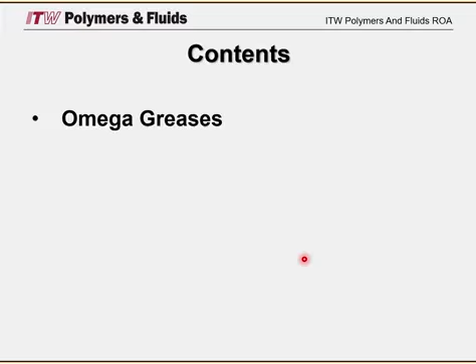So we will start today by going through our contents. Basically, we will be going through Omega greases today, also ITW background, Omega oils, gear oils and chain oils in particular, and food machinery products.

So I want to introduce to you the background to ITW. We were founded in 1912 in Illinois, USA. We are over 100 years old. We celebrated our 100th year anniversary in 2012, so it makes us over 107 years old.

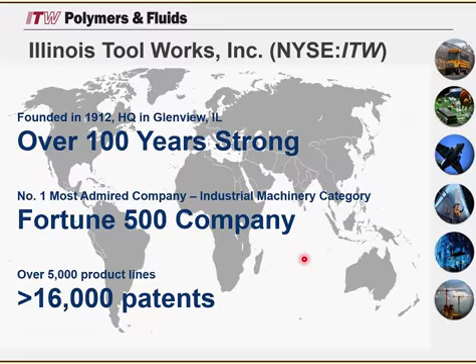We are part of the Fortune 500 company. I think this year, 2019, we're ranked around about 214. As an ITW company, we have over 16,000 patents.

ITW employs approximately, I think nowadays there's about 48,000 employees around the world. We operate in 57 countries, and 2017 total sales revenue was about 14.3 billion. In 2019, our revenue was a little bit improved, 14.8 billion.

As I said, we operate around the world, and most of our revenue comes from three regions around the world. 53% of our revenue comes from North America. Middle East, Europe, and Africa accounts for 28%, and Asia Pacific and others accounts for 19%.

In terms of our global reach, especially our manufacturing and production sites around the world, for Omega, we have production sites mainly in a couple of regions, in Europe and in Australia. Basically, about 80 to 90% of our products come from Australia and also Europe.

We have some products, especially not Omega, but in terms of Magna Welding, a lot of our products come from the USA. We also have manufacturing plants in Asia Pacific, namely in China, and also manufacturing sites in Brazil and India. Although for Omega and our other Magna brands, we don't have any products coming from these two manufacturing sites.

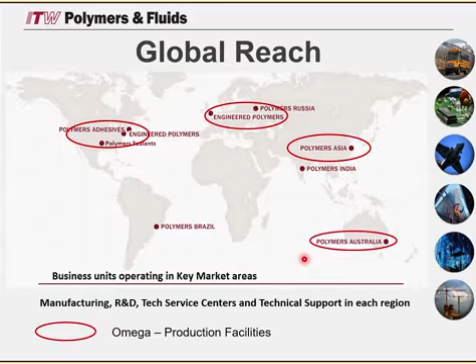So we'll talk about Omega next, greases. So why do we use a grease?

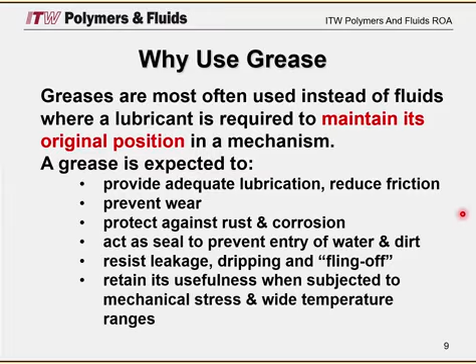Well, greases are most often used instead of fluids where lubricant is required to maintain its original position in a mechanism. So a grease is expected to provide adequate lubrication and reduce friction, prevent wear, protect against rust and corrosion, and act as a seal to prevent the outside environment, water, dirt from entering the equipment, the bearings, resist leakage, dripping and fling off, and retain its usefulness when subjected to mechanical stresses and perform under a wide temperature range.

So when to lubricate with a grease? When do we use it? Well, there are many various reasons, and these are some of the reasons I've put down here, mainly to decrease the frequency of lubrication, especially in extreme locations. For example, if you have a wind turbine, wind generator, those things are very high up in the sky, and you don't want to frequently change your oil or your grease, because it does take a long time to reach those parts in a wind turbine.

You want to seal out contaminants. If you have a very dusty environment, or maybe sometimes like in mining or construction where there's a lot of dust and dirt, you don't want that dust and dirt entering your equipment, so you would use a grease.

Or, for instance, for intermittent operations, if you have some generators which you're not usually using, or some air compressors which you're not usually using 24 hours, maybe as a backup system, and so you're only using it for maybe a few hours or a few days during the month or year, so you use a grease.

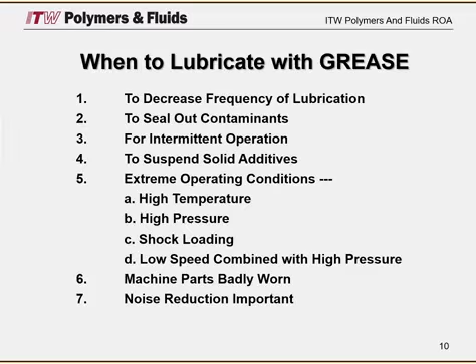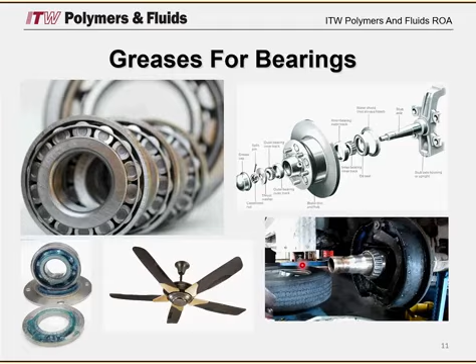So basically, greases are used to lubricate bearings, and you can find bearings in a wide variety of equipment. Bearings are a device to support and reduce the friction of motion between fixed and moving machine parts. So you can find them in almost every single machinery, you can see here in fans, wheel bearings, DVDs, bikes, washing machines, etc. You can find bearings in almost everything.

So what is a grease? Well, a grease is a solid or semi-fluid product of dispersion of a thickener agent in a liquid lubricant.

Also in greases, apart from having a thickener agent and the base oil, you would also have additives. These additives are ingredients which impart special properties that are included in the grease. Here you can see this is a photograph of Omega 57, and you can see the thickener inside as well.

So a grease is basically made up of three parts: the base oil, the thickener, and the additives. We can consider a grease to be like a sponge. The pores are created by the thickener, and the pores are what holds the oil in the structure.

Once we apply forces or pressure stresses to the grease, or the sponge in this analogy, it causes the oil to be released from the thickener to provide the lubrication. Once these forces or stresses are reduced or not there anymore, the oil should be reabsorbed back into the thickener.

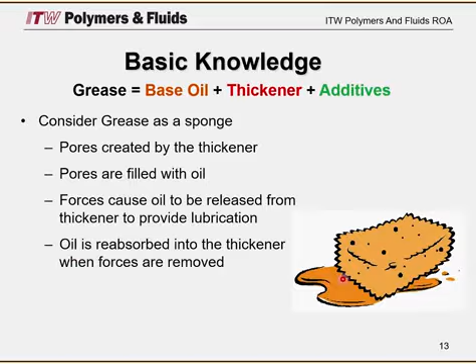In terms of composition, thickener is approximately 2% to 30% in the grease, the majority of which is the base oil, which accounts for 60% to 98%. In the thickener, you have various types of thickener content: metal soaps, metal complexes, non-soaps and soaps, and clays, etc. And the base oils include mineral oils, synthetic oils such as polyalpha olefin, esters, polyglycols, silicone oils, PFPE, etc.

And also additives account between 0 and 10%. These additives add extra performance enhancers to the grease, such as anti-aging, anti-corrosion, EP additives, etc.

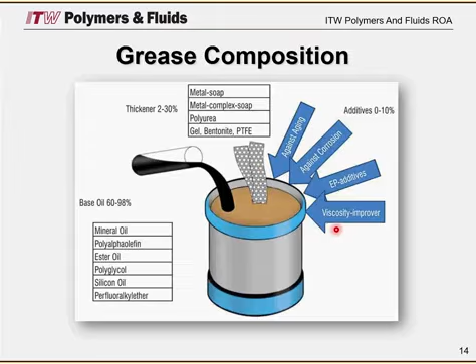So the base oil is basically used as the lubricant within the grease. They can be made of minerals, synthetic, natural oils, etc., and used in combination with the thickener, which provides the body and the structure.

These thickeners can be redefined as soap or non-soap components. The additives enhance the performance of the lubricant with oil-soluble components to control extreme pressure, wear, etc. We can also have solid components such as MoS2, graphite or polymers, calcium carbonate, and other types of solid additives.

About the thickeners, the grease consistency, or how hard or soft, is governed by the thickener and the composition of the thickener. You would think that the base oil, being higher or lower viscosity, would have some effect on whether the grease would be hard or soft, but in fact it doesn't.

We can have very thick greases with very low viscosity, ISO VG100, and we could have semi-fluid greases where the viscosity of the base oil would be quite high, ISO VG460 or higher. So you can see the consistency of how hard or soft doesn't depend on the viscosity of the base oil. It really depends on the thickener content. If it's a higher thickener content, then the grease would be firmer, and if it's a lower thickener content, the grease would be softer.

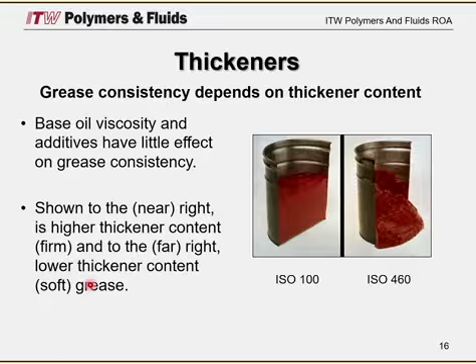So there are two types of thickeners, as I mentioned before: soap or non-soap. And it must be emphasized that different thickener types of greases should not be mixed unless their compatibility has been confirmed by testing to the relevant applications. Within Omega, we have the compatibility chart, which we will go through later on.

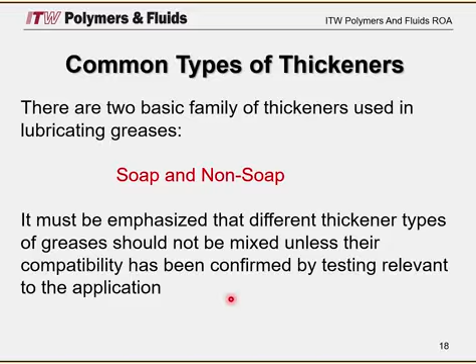So what types are soaps and non-soaps? Soap-based thickeners are lithium, calcium, aluminium, sodium, etc. You can have straight lithium, aluminium, calcium, sodium mixed, or complex, like complex such as lithium complex for our Omega-22, or straight thickeners, soap thickeners like our Omega-77, which is lithium 12-hydroxystearate.

Then there's also non-soap thickeners such as clay, such as our Omega-71, polyureas such as Omega-85, and others, namely silicon dioxide based thickeners such as Omega-38. So basically there are two types of families of thickeners.

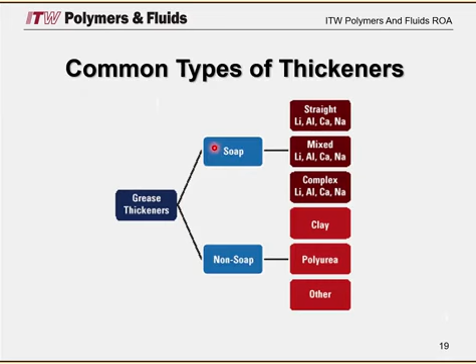Now we come to the additive part. Additives make up between 0 and 15% of a typical grease to enhance the lubricant performance. Additives bring properties to the grease that the thickener and the oil cannot provide alone, or can only provide on a limited basis.

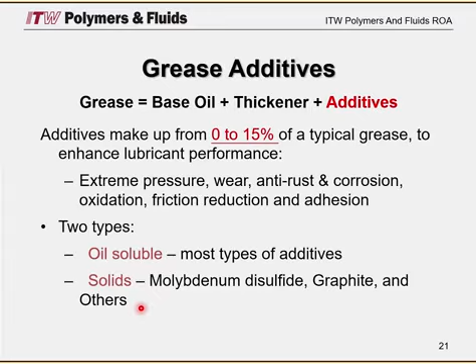There are two types of composition for the additives: they are either oil soluble or solids. Solids meaning solid additives such as MOS2, graphite, and others. These additives have different types and functions. They can be anti-wear EP agents, which reduce friction and wear and prevent scoring and seizure, corrosion inhibitors and rust inhibitors, viscosity modifiers, antioxidants, etc. These are the purpose of what these additives are for and their functions.

So in terms of base oils, we use the API, American Petroleum Institute, base oil definitions. All base oils can be categorized into 5 groups. Group 1 and Group 2 are mainly mineral oils. Group 3 and Group 4 are known as synthetic oils, such as PAO. Group 5 are the others, which include silicone oil, polyglycols, etc.

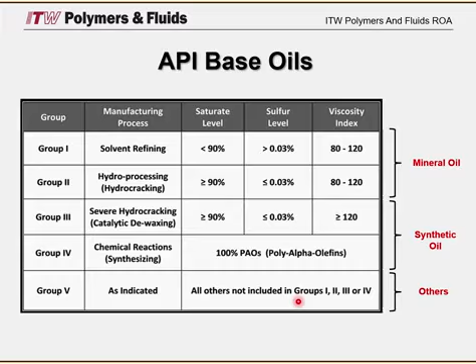We have some diesters, polyesters. We don't use polyglycols as a grease, but we do have polyglycols more as a carrier fluid, especially in Omega 35. Obviously, we don't have silicone oils in our greases.

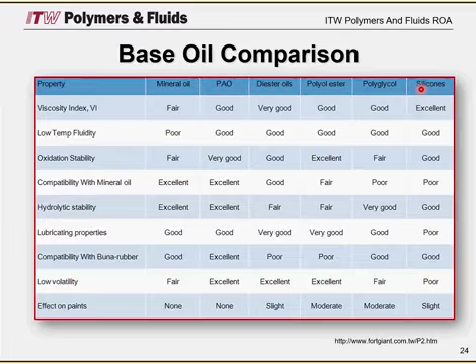So for base oils, we talk about the viscosity of the base oil. Viscosity, the simplest definition, is the fluid's resistance to flow. So viscosity is a lubricant's resistance to flow. The viscosity of an industrial lubricant is normally given in units of centistokes.

Or we have the ISO VG naming system, VG 32, 46, etc. In Omega, we also use the SAE naming system. So SAE 5 would be ISO VG 15, SAE 10 would be ISO VG 32, etc. Viscosity is the main feature which influences the efficiency of the lubricant.

So in terms of real-world experience, what does viscosity mean? For water, normally the viscosity is 1 at a temperature of 20 degrees. You can see that viscosity is really governed by the temperature at which it's measured. For instance, water at 20 degrees has a viscosity of 1. Milk has a viscosity of 3 at 10 degrees. For us, we're normally more used to diesel, which has a viscosity of approximately 6 centistokes at 40 degrees.

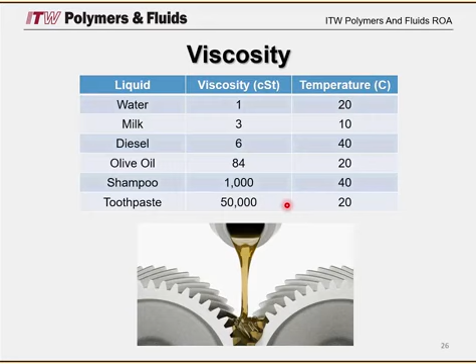All the way to maybe a semi-fluid or even like hard toothpaste, which would have a lot higher viscosity at that temperature range.

So this is just the ISO VG classification. You can see here VG 32 all the way to 3200. The midpoint viscosity is 32, and it also has a range. So anything between 28.8 to 35.2 centistokes at 40 degrees can be named as ISO VG 32, and each one would have a mid-range, a minimum, and a maximum.

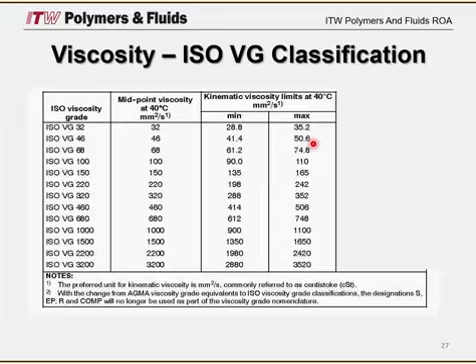Viscosity is really dependent on the temperature at which it's measured. At higher temperatures, say 100 degrees, a liquid or oil would obviously have a much lower viscosity. At a lower temperature, between 0 and 50 degrees, the liquid or oil would have a much higher viscosity. So viscosity of a fluid is really a function of temperature.

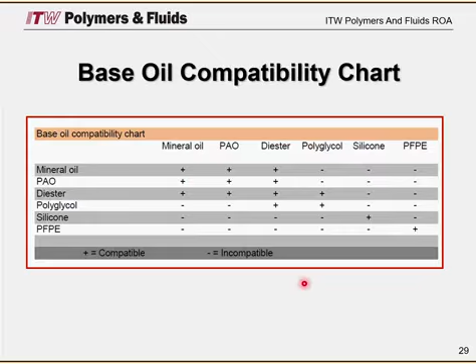In terms of grease consistency, how hard or soft it is, this is defined by the NLGI rating. NLGI 000 is a semi-fluid with a worked penetration of between 445 to 475 - I need to check that figure again. The analogy would be ketchup, all the way down to NLGI 6, which we very rarely see, with a worked penetration of 85 to 115. Normally in industry we see 000, 00, 0, all the way probably to 3, and the stiffer greases 4, 5, 6 we very rarely see.

The DN value is like the maximum revolutions per minute that we normally recommend our greases to be used at. For something like a very stiff grease, like an NLGI 3 for Omega 57, our DN value would be approximately up to about 150,000. For most of our greases, it's between 200,000 and 300,000 DN value.

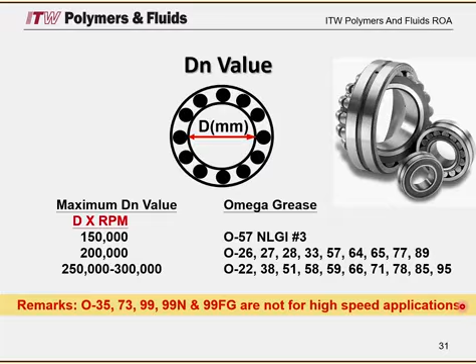In terms of operating temperature, if between minus 34 and 37 degrees, depending on the speed factor, we would recommend maybe an NLGI 1 all the way to NLGI 2. Of course, for higher temperatures we would normally recommend a much stiffer grease. This is just a quick reference you can use when going to a customer, for what sort of NLGI they should use. It really depends on the operating temperature and also the speed - low speed or high speed, depending on the NLGI. For a very low speed application I would use an NLGI 1, and for high speed we would use a little bit of a thicker grease.

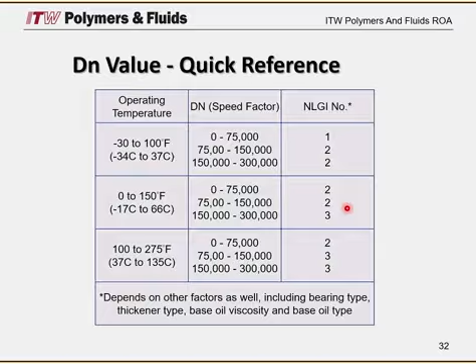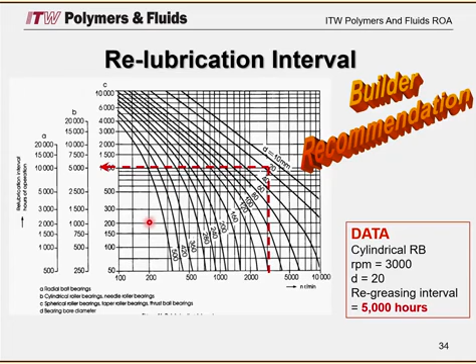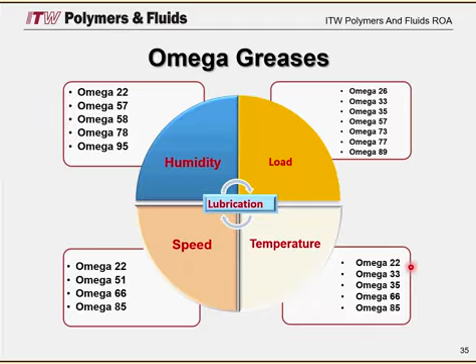In particular, 66 and 85 would be our first recommendations for high-speed applications, mainly because for 66 especially, the base oil viscosity is quite low, which is more suitable for high-speed applications. For high temperatures or extreme temperatures, both high and low, we would recommend greases 22, 33, 35, 66, and 85.

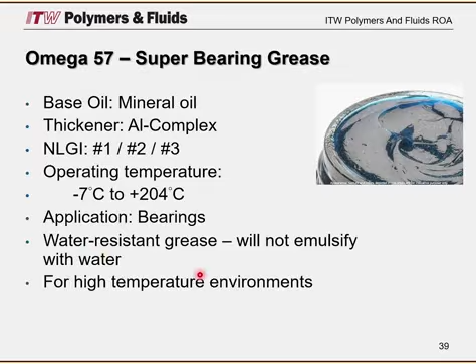Same application for bearings, and as we saw from the chart before, aluminium complex thickened greases have very good water resistance and will not emulsify with water, so they can be used for high temperature environments.

Omega 89 is one of our most recent additions to the Omega range. This is a multi-complex soap, a mix of lithium and calcium, so it has the best of both worlds in terms of mechanical stability and water resistance. It has a very high 4-ball weld load, 800 kg, without the use of any solid additives.

Because it has a calcium and lithium complex mix, it has very good water resistance and anti-corrosion properties, and a relatively higher operating temperature than, say, Omega 77, which is just a single lithium 12 hydroxy type. It also has very good low temperature resistance, -30, compared to something like -7 for Omega 77.

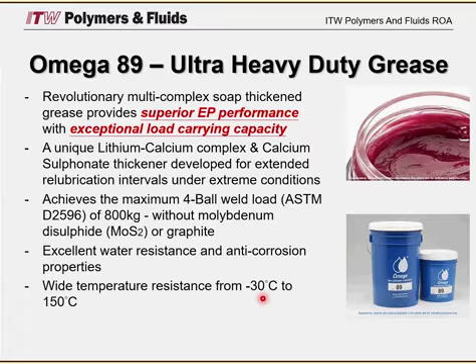So it has a wider temperature range, -30 to 150, compared to 77. In terms of non-soap type greases, polyurea are one of our best top-selling products. Omega 85, again, is mineral oil, and the thickener is polyurea, available in 2 NLGI grades, 0 and 2.

We have a wide operating temperature between -10 to 230. The main applications, again, are for bearings, but mainly in LV, MV, and high tension electric motors. Also, it's proven for industrial use.

We have OEM approvals, customer testimonials, and case studies. We recently came across a case study from a tire distributor who used 85, and he was able to prove that in operation it was able to bring down the equipment temperature by, I think, over 10 degrees. Obviously, if you're bringing down the equipment temperature, you would also save a lot on power.

Also, he demonstrated that using 85, they were able to reduce the noise of the bearing. I have a video, but I can't show it here, showing the before and after effect of the bearing, and after using 85, there's a significant reduction in the noise of the bearing. If you need that video, we could arrange to put it on the intranet site in the near future.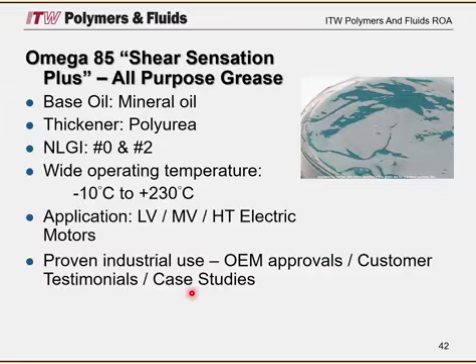Omega 22 is PAO. So now we're introducing the synthetic types of base oils for our greases. Omega 22 uses PAO synthetic base oil, lithium complex thickener, with solid additives - PTFE as a solid additive - available in NLGI 2. Because we're using PAO base oil, it has a much wider operating temperature, especially the lower range of -40, and the upper range up to about 210 degrees.

Can be used for high loads, and because of the molecular structure of PAO, it resists oxidation, and resisting oxidation leads to longer grease life. Some applications: the paper and corrugated cardboard industry uses a lot of Omega 22.

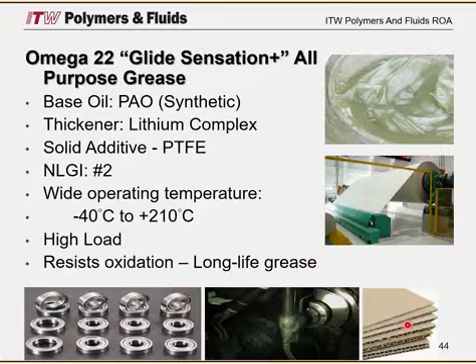Then we have our PFPE base oils, such as Omega 26. Again, this has a PTFE thickener, available in NLGI 2. Not so high range at the low end - operating temperature of -25 - but it has a high range, operating up to 280 degrees C.

Chemically inert, meaning there would be no changes in the grease if it's subjected to acids or alkalis, and it's non-toxic and compatible with rubber, plastic, or metals. We would recommend something like 26 if you have plastic or rubber bearings. We wouldn't recommend normal greases for plastic or rubber bearings, but something like a 26 would be fine with plastic and rubbers.

It's used for anti-friction, plain bearings, small gears, slides, pins, valves, plungers, screws, etc. So a wide variety of uses for this grease.

So we just want to touch upon possible grease failures. Sometimes we get a lot of inquiries about why a grease is failing. Some of the reasons I've consolidated, but the number one reason why grease fails is that the incorrect lubricant is used.

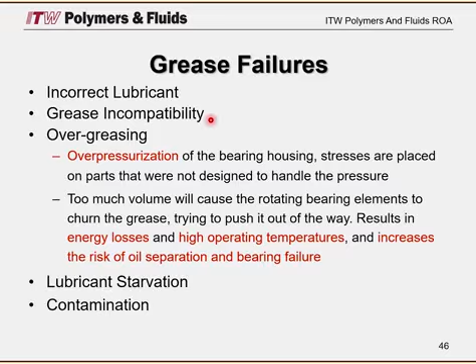In terms of compatibility, as long as two lubricants have similar thickener systems and base oils, they should not have any compatibility issues. That's not always the case. Sometimes, apart from thickener systems and base oils, greases also contain additives. Obviously we don't know what additives are used in the greases, especially our competitors'. And sometimes the additive chemistry can be different, which could also cause compatibility issues. So in general, yes, as long as the thickener system and base oils are similar, you should not have problems, but it's not 100%.

It's important to thoroughly clean or purge the old grease from the parts to ensure the new lubricant's properties are not changed significantly as a result of being mixed with the old grease. So worst case, if you don't know what the old grease is, the best practice is to clean and purge out the old grease. You may have to open the bearing and do a thorough clean-out before using the new grease.

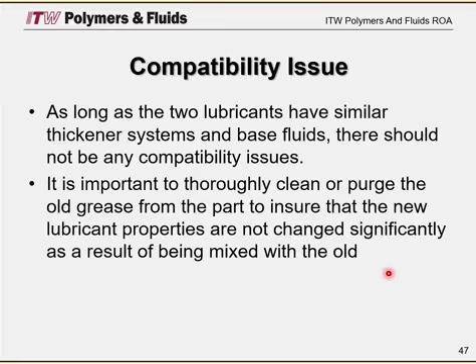So some examples of overgreasing you can see here. The grease is really coming out of the bearing—that's from adding too much grease, and it's coming out of the bearing. You can see it very clearly here. And here we can see the mixing of two different types of greases. You can see two different colors, which represent two different types of greases.

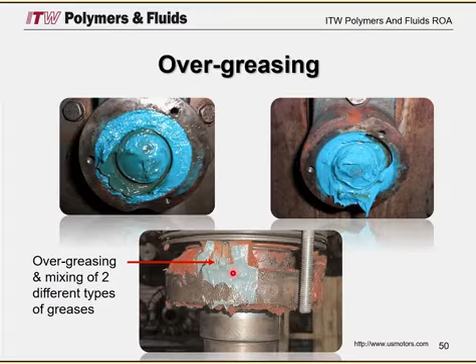Overgreasing, you can see here also, comes out of the bearing, and it's just a waste. It serves no purpose at all—it doesn't help the bearing, and it's a waste of the grease.

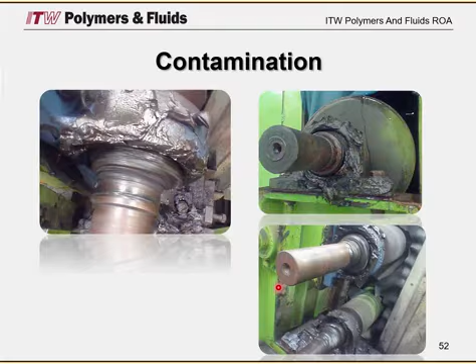This is what I was talking about before, about the grease being subjected to different chemicals. You can see here the grease has completely changed color due to being exposed to alkaline vapor. I think it was probably at a limestone or cement factory, where they're using lime, or perhaps a chemical factory.

So I'd also like to talk about oil separation. Sometimes, especially for a product like Omega 77, you can find on top of the grease—in lubricators, pails, drums, or the grease gun—the presence of oil, and this is known as oil separation. You need to understand that this oil separation is insignificant when compared with the mass of grease in the container.

So something like here, you can see some oil separation within these holes of the grease. You would get more oil separation if the grease is shaped like this. If it was flat, the grease would have less oil separation.

The separated oil can be safely stirred back into the bulk of the grease. So if this happens with the grease, what you can do is just use a ladle or some sort of instrument to mix it back into the grease. You don't have to use a mechanical stirrer—it's just done by hand, folding the grease over and over. Then, because it's like a sponge, as I said at the beginning, once you've applied some pressure to the thickener, the oil should be reabsorbed back into the grease.

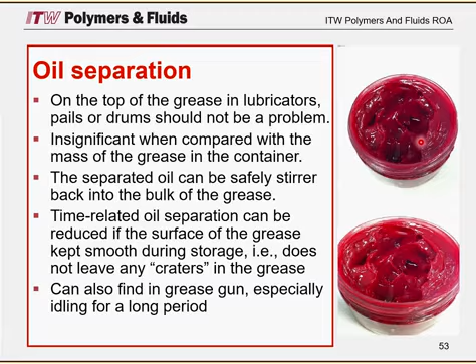So it's nothing really to be worried about, unless the whole top area is completely covered — if in a grease pail you see a very high layer of oil, then maybe there could be concern, but I very rarely see that sort of case. It would just be like small puddles on top of the grease.

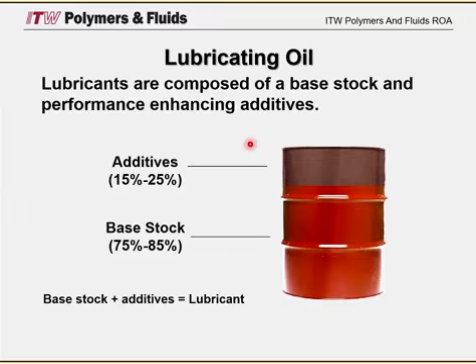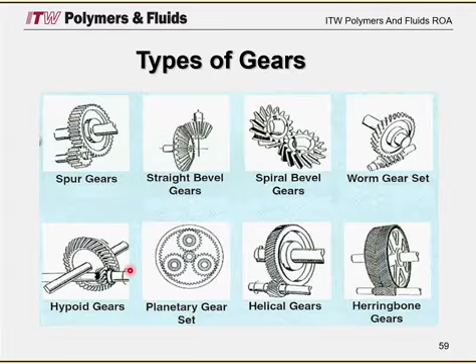In terms of lubrication of gears, we can find gears in many different types of everyday items, from watches to your bicycle to huge open gears found mainly in the cement industry. Different types of gears include spur gears, bevel gears, helical gears, planetary gears, herringbone — these 8 types basically make up most of the gears we can find. They're used in all types of industries, from agriculture, automotive, sugar, cement, chemical, and many more, so almost every industry has some type of gear application.

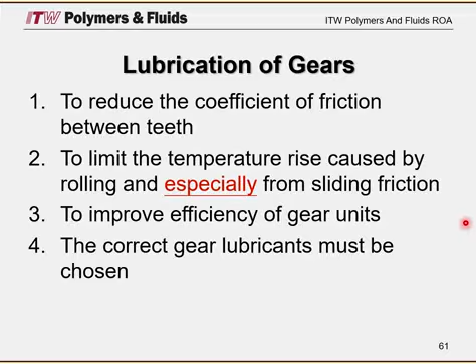Gears are used to reduce the coefficient of friction between the gear teeth, to limit the temperature rise caused by rolling, especially from sliding friction. This is particularly relevant in worm gears, where it's mostly sliding friction. To improve efficiency of the gear units, the correct gear oils must be chosen.

For Omega, we have both grease products and oil products. For grease products, there's Omega 64 and Omega 73 for open gears. We also have food grade NSF H1 gear oils, 585 and 588, our mineral gear oil 670, our worm gear oil 680, and for industrial gears, Omega 690.

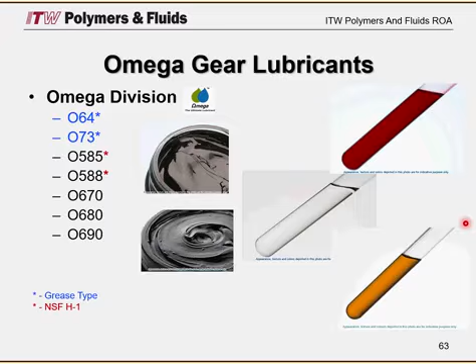In terms of greases, Omega 64 is a pin and bushing and track roller grease, mineral oil based, 00 semi-fluid, ultra tacky, with a temperature service range between -7 and 149, and provides extended service compared to ordinary greases. Can be used in slow moving industrial gears, or for example open gears where fluid grease is required.

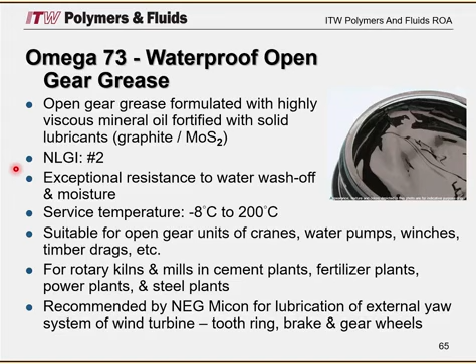Omega 73 we use for open gear greases. It's fortified with solid lubricants, graphite and MoS2, available in NLGI 2, and has exceptional resistance to water wash-off, with an operating range between -8 and 200 degrees C. You can use these in open gears or cranes, water pumps, winches, timber drags, rotary kilns, mills, cement plants, etc. It's also been approved by NEG Micon, now Vestas, for use in the external yaw system of wind turbines.

In terms of oil, especially for the food industry, we have Omega 585, which is synthetic based, PAO based, VG 220-460, NSF H1 approved. It's an extremely adhesive lubricant with excellent protection against water wash-off and a wide operating temperature between -30 and 240. Used for all gear units in the food and beverage industry, and also approved by David Brown.

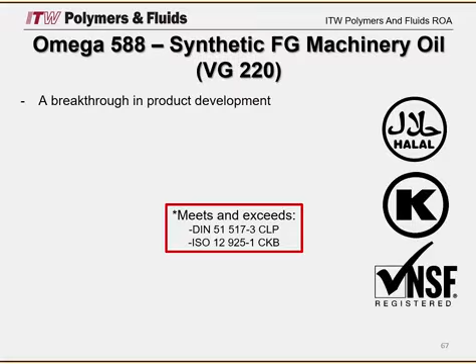Our most recent addition is Omega 588, which apart from being NSF H1 approved, is also halal and kosher approved. It meets FDA 21 CFR since it's H1 approved, and is manufactured in a facility that is ISO 21469 approved. It's also approved for industrial use, meeting and exceeding DIN 51517-3 CLP and ISO 12925-1 CKB. Based on PAO technology, the base oil is PAO, and it can be used for multi-purpose lubrication, hydraulic circulating systems, and medium to low loaded bearings.

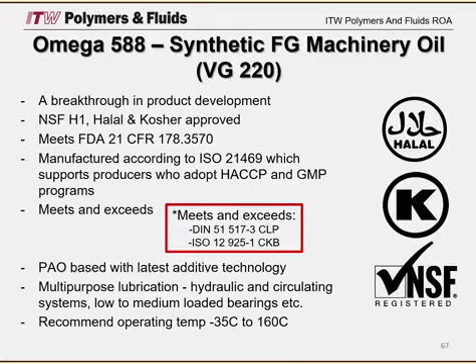Omega 670 is a straight mineral oil, meaning it's just the base oil with no additives. Some applications require just a base oil without using any additives, so this is a gear oil for those sort of applications, suitable for lubricating and protecting gear units where non-EP oils are required.

680 is used for worm gears. It's formulated with mineral oils as the base oil, and formulated with solid lubricants to provide protection for elevated temperatures up to 400 degrees C. Available in VG 220 and 460, and can boost efficiency of worm gear sets by 8%. It can also be applied on bevel and spur gear units, and is recommended by David Brown.

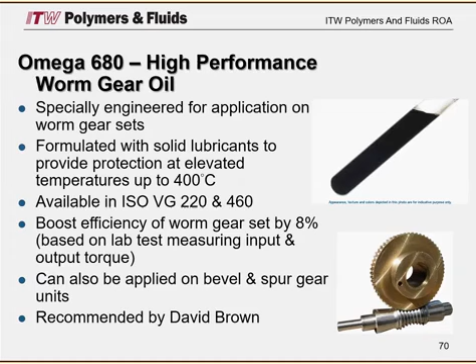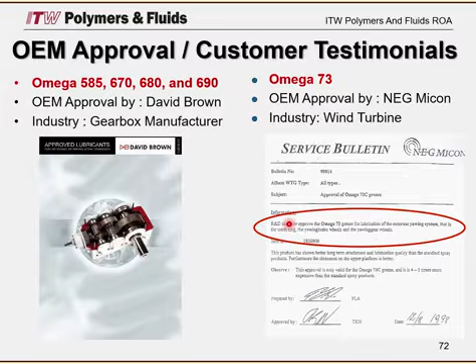The following slides are just the OEM approvals and customer testimonials. I won't go through them each one, but you can see, for instance, Omega 73, which was originally approved for NEG Micon, and now NEG Micon has been merged with, or been bought by, Vestas. David Brown gearbox manufacturer approved lubricants list - we have Omega 585, 670, 690, 680 and 690, which are on the approval list. And then other equipment manufacturers which also have these approvals, so you can go over these at your leisure.

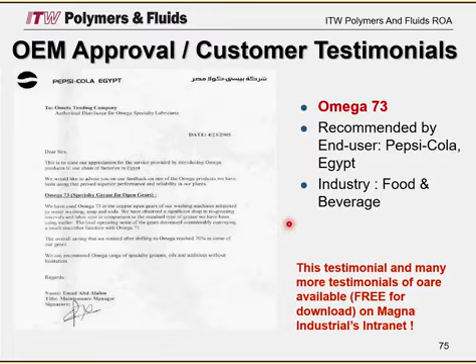Factors to be considered when choosing a chain lubricant: whether those chains are under high loads, and if under high loads, whether elongation happens on those chains. If that is the case, we normally recommend chain oils with EP additives or very high viscosity base oil, as high load carrying capabilities of the chain oil is required.

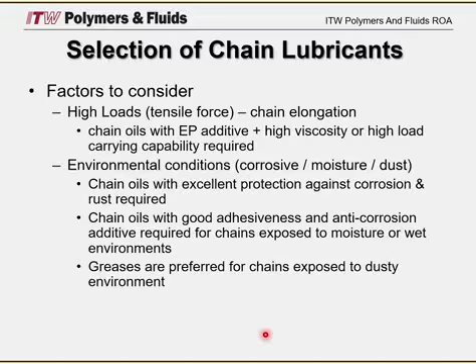Sometimes we have to understand the environmental conditions - whether it's a corrosive environment, there's moisture, or there's dust - and chain oils with excellent protection against corrosion and rust are recommended for these type of environments. Chain oils with good adhesiveness and anti-corrosion additives are required for chains exposed to moisture or wet conditions. Greases are preferred for chains exposed to dusty environments, because greases can seal the chains from being exposed to those dusty environments.

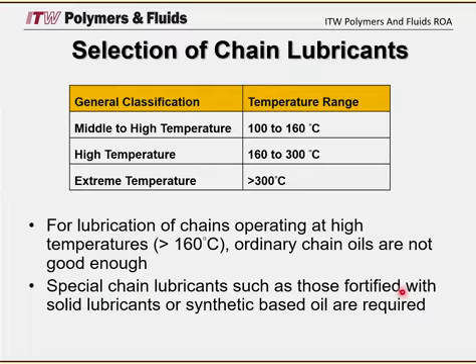In terms of temperature range, chains are often subject to different temperature ranges. Medium to high temperature would be up to 160, high temperatures between 160 and 300, and extreme temperatures would be over 300 degrees C. For lubrication of chains operating at temperatures greater than 160 degrees centigrade, ordinary chain oils are not enough, so we must use special chain oils, such as those fortified with solid lubricants or synthetic base oils.

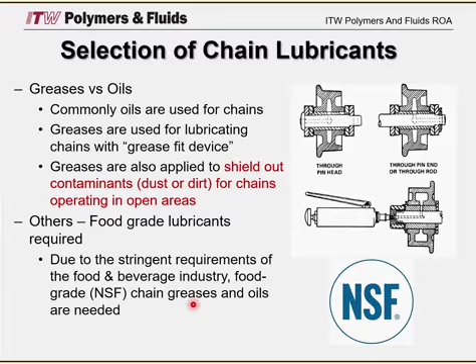As you saw before, in Omega we have a selection of both greases and oils. Commonly chains are lubricated with oils, but greases can be used sometimes if there are grease fit devices to the chains. Greases are applied in some instances to shield out contaminants, especially in very dusty or dirty areas, for chains operating in open areas. Others to consider: if food-grade lubricants are required due to stringent requirements of the food and beverage industry, something like an NSF-approved chain lubricant or chain grease is required.

For much higher temperatures, if the chain is subjected to a lot higher temperatures, you would probably need a chain lubricant which has solid lubricant. Solid lubricants are included in the lubricant to provide extra protection to the chain, usually utilizing dry lubrication on the chains at elevated temperatures.

What I mean by this is, say for instance, we know that mineral oils can only withstand up to maybe 200 degrees. Definitely over 230, mineral oils normally cannot withstand it, and they start to decompose. So once that starts to happen, you have nothing really lubricating the chains. That's why they have to rely on the solid additive to provide some sort of dry lubrication to the chain. The oil-based fluids act as carrier fluid of the lubricants at elevated temperatures.

So some chain lubricants only use oil, especially if they're using polyol esters as a carrier fluid. Polyol esters have some limited lubrication to the chain at lower temperatures, but once high temperatures occur above maybe 250, or if we're approaching 300 degrees C, those base oils, the carrier fluid, polyol esters, will evaporate or flash off. So you're only left with the solid lubricant to lubricate the chain.

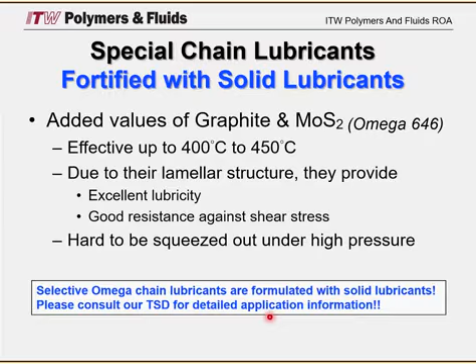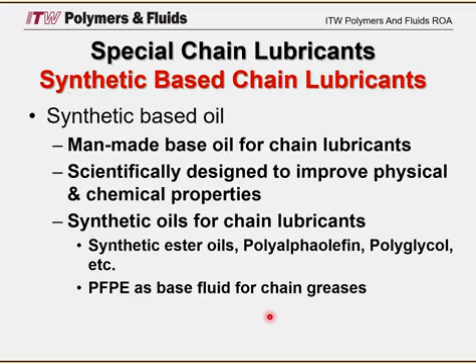Synthetic base oils have a much higher viscosity index, meaning they can withstand a much wider temperature range. And also some synthetic base oils have a low tendency to carbonize. So like if you're using a mineral oil-based chain lubricant at very high temperatures over 250, once the mineral oil starts to decompose, it would carbonize. And once it carbonizes on your chains, then it would cause blockages.

Those carbon deposits cannot fall away, they will stick to the chains. So that's why you have to use synthetic base oils which have low carbon when they are subjected to higher temperatures, such as synthetic esters or polyol esters, which would give a lot less carbon, or leave a lot less carbon once they start to decompose.

High temperature stability, maintaining high performance at high temperatures, high lubricity, protection of the gears and chains against wear. Again, if you need information on what sort of synthetic chain oils that you should use, please consult us.

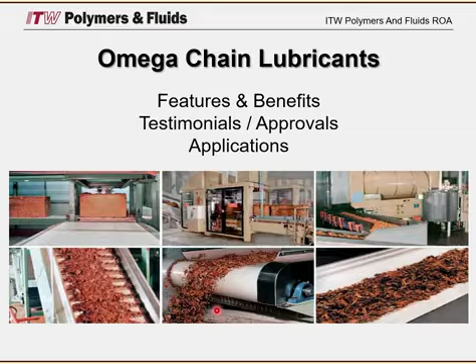And next would be features and testimonials. Oh, no, I don't think so. I think I took those out to save time.

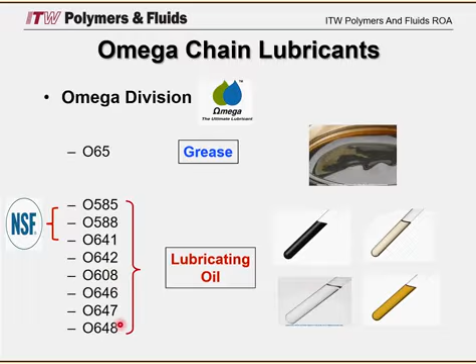In terms of our product offer in Omega, we have Omega 65, and also, as I said before, we also have the oils, Omega 585, 588, 641, and these would be food grade. And then we also have the other 642, 608, 646, 647, 648, which is the other chain of oils.

65 is the long life chain and cable grease, which is our grease offering for chains. It's fortified with graphite and available in the semi-grease NLGI 00 for better fluidity and penetration into especially the chains. And it's very tacky, so it resists fling off. Surface temperature between -29 and 149 degrees C. Can be used for hoists and lifts of chains, also suitable for wire ropes and crane cables.

641, Omega 641, is used for the food and beverage industry. It's food grade approved, NSF-H1 listed and approved, and available in ISO VG 220.

Extremely adhesive, known for its adhesiveness and has excellent protection against water wash-off. Has quite a good temperature range for operation between -10 and 280. And because it is made of synthetic ester, it leaves little or no residue on the chain once it's subjected to higher temperatures.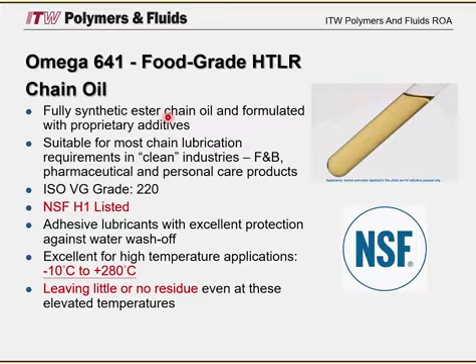642, apart from being NSF H1 approved, is also halal and kosher approved, meeting the various FDA 21 CFR and ISO 21469 standards. Again, this is synthetic ester based with additive technology, formulated with both ester and special additives, and it has the properties of being a high temperature, low residue chain oil for oven chains, operating conditions between -15 and 240.

It's available in two viscosity grades, VG68 and VG220. And you can see here, there's a slight difference in operating temperature between the two viscosity ranges.

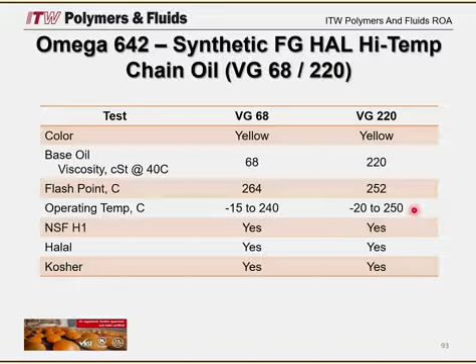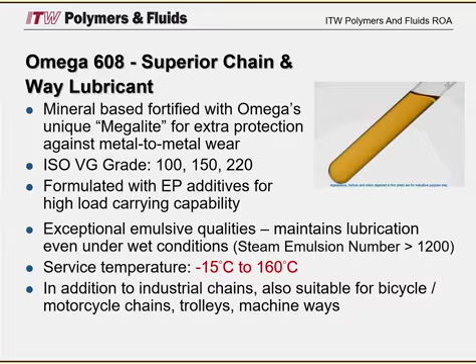608, which is the way and chain oil, is mineral oil based with the Omega Megalite additives added to it. Available in 3 viscosity grades, VG100, 150, and 220. It contains EP additives as well. Has exceptional emulsive qualities and maintains lubrication even under extreme wet conditions, with service temperature between -15 and 160. Suitable for industrial chains, also for everyday items like bicycle chains, motorcycle chains, trolleys, and machineways.

646 is a mineral oil-based chain lubricant with MOS2, available in 3 viscosity grades: VG68, 150, and 220. Due to the presence of MOS2, it relies on dry lubrication, especially at temperatures over 300 degrees up to 400 degrees.

Formulated with special additives to cope with the stick-slip that commonly occurs in slow-moving, heavily loaded chain equipment. Because it contains mineral oils, you would get carbon residue at very high temperatures, so we recommend periodic cleaning of the chains to keep them in optimal condition. Also suitable for most types of chains and conveyors.

647 uses polyol ester base oil, so it would leave no carbon residue on the chains at very high temperatures. It's formulated with MOS2, meaning at temperatures above 300 up to 400, the MOS2 would be the additive used to lubricate the chains, because at that elevated temperature the synthetic base oil would have already evaporated. But the good thing about this is there would be no carbon residue, and there would be low smoke at those higher temperatures. So there would be little need to clean the chains, because there wouldn't be any carbon residue on the chains if they were using 647.

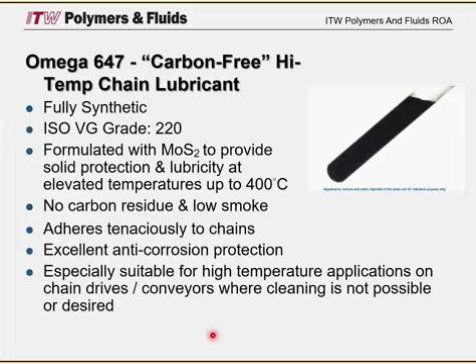Smokeless - again this would be 100% synthetic base oil, available in VG150. So this would be smokeless, whereas with 647 you would probably have some low smoke at those elevated temperatures, but 648 would have no smoke. Sometimes end users at those high temperatures, if they see some smoke, get very concerned. That's why there's Omega 648 - because at those high temperatures there would be no smoke on the chains.

With 648, because there are no solid additives, it could only withstand temperatures up to 270. So once 270 is surpassed, all of it would evaporate or flash off, as we call it, and then there would be nothing lubricating the chains. So this is effective if you really want to maintain super cleanliness on the chains in operation - specifically ideal for chains operating at high temperature in a clean environment.

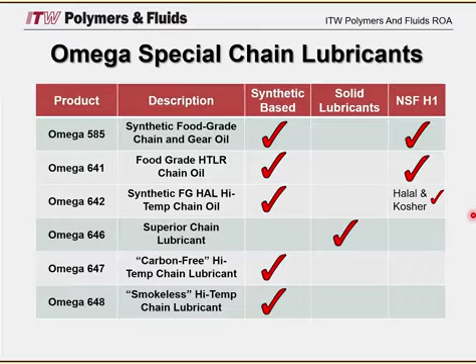So this is just a summary of our products, description, which ones are synthetic base, which ones contain solid additives, which ones are food grade, and which are halal and kosher approved, and some of our end users. Okay, so that completes the chain lubrication.

Next would be Omega food grade lubricants. So what is a food grade lubricant? It's maintenance products for use in the food or other clean industries. These products contain no toxic or harmful ingredients and are not usually designed to come into direct contact, but there are no health problems if there is accidental contamination of the food.

So that's very important - I think sometimes there's some misleading information about NSF-H1. NSF-H1 is for use in the food industry with incidental contamination. So it doesn't mean it can come into direct contact with food. It means no harm would come if the grease or the oil accidentally contaminates the food.

There are NSF-3H products which can have direct contact, but those are mostly used for mold release sort of products, where there would definitely be direct contact between the product - the grease or the oil - with the food. But for our case, for Omega oils and greases, ours are H1, meaning only used for accidental contamination of the food.

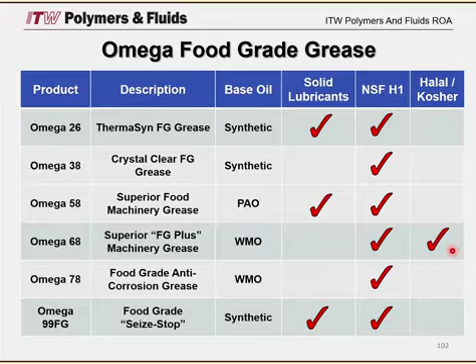So a summary of our food grade products: 26, 38, 58, 68, 78, and 99 FG. The base oils and solid lubricants vary by type. Obviously, they're all H1 approved, but only 68 here is halal and kosher approved also.

Omega 58. I bring this up because in 2017-18 we started to change the source of this product. The reason we had to change is because the old product has a Snow White sort of appearance. Obviously, to get that Snow White appearance, you have to use some additive.

The additive we used was zinc oxide, which is a heavy metal, and it started to be banned the last couple of years from formulations of this type of product. So we had to use a different additive. The result is not as good, not as white, it's slightly yellow, sort of brownish in color. But it's unavoidable as countries and regulations become more and more stringent. We have to follow suit, or else we cannot sell the product.

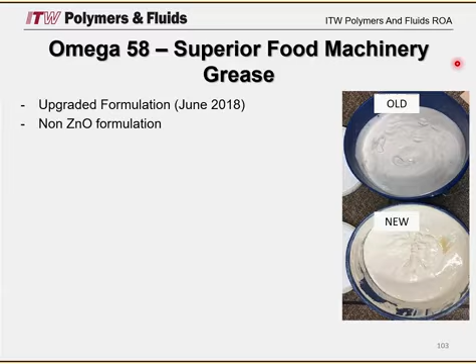So it was an updated formulation in 2018 - a non-zinc oxide formulation. Now it's manufactured in the UK and uses synthetic base oils, PAO, and contains PTFE also as a solid lubricant. 0 and 2 NLGI grades are available, H1 approved.

Recommended operating temperature is between -40 and 165. There's another thing I'd like to point out, especially visible in this photograph: the presence of oil separation. This usually occurs with products that contain solid additive PTFE. Something like an Omega 28 or 26, which is also PTFE based, would also have this phenomenon.

As I explained during the grease section of this presentation, oil separation is a natural occurrence, and the way to minimize the effect, especially when the product goes to the end user, is to use a ladle or some sort of mixing instrument and manually fold the oil back into the grease. Once you do that, there's pressure on the thickener to reabsorb the oil back into the structure. So you will see, especially if you open a new pail after long storage, some evidence of oil separation in the grease.

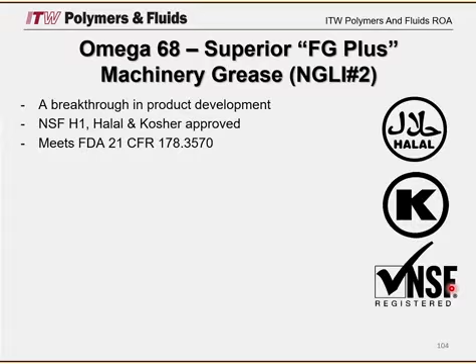Also, Omega 68, which is a relatively new product for us, is NSF H1 halal and kosher approved. It's based on white mineral oil, and the thickener is calcium sulfonate, so it's very good for extremely wet conditions. Operating temperature is between -40 and 200 degrees C.

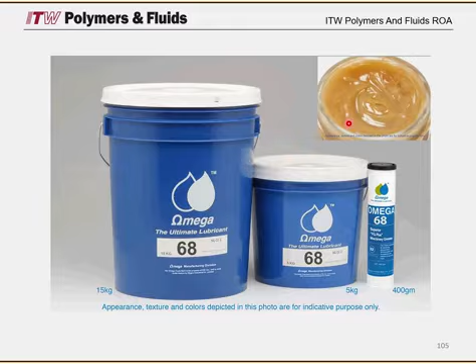You can see here the appearance of 68 is similar to 78 and 95, because basically they share the same calcium sulfonate thickener - a slightly creamy, off-white, yellow appearance. In terms of oils, we have 580, 585, 588, 609, and 615.

588 is our machinery oil, which apart from being NSF H1 approved, is also halal and kosher approved. 580 is white mineral oil based. 585, 588, and 615 are PAO based. 609 is also white mineral oil based.

638, 641, 642 - this is the penetration oil for the food and beverage industry, F&B. 641 is just the chain oil, and 642 is also the chain oil, but the major difference is that 642 is also halal and kosher approved.

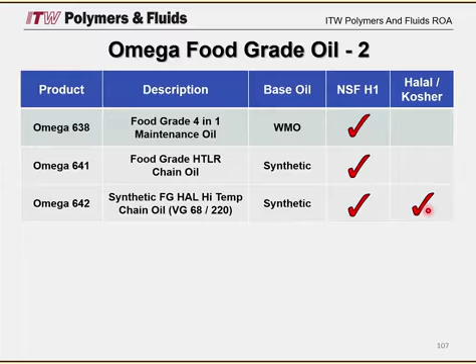So 588 is NSF H1 halal and kosher approved, meets and exceeds ISO 6743-4 HMHV, also DIN 51524-2 HLP and 51524-3 HGLP, and these are basically the hydraulic oil specifications for industrial hydraulics.

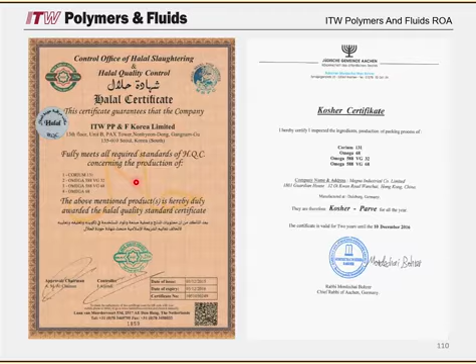These are the approvals that we have for these products from halal and kosher. So only these products are halal and kosher approved: 68, 588, and we have another product in Corium, the Corium 131, which is the aerosol grease, also approved by halal and kosher.